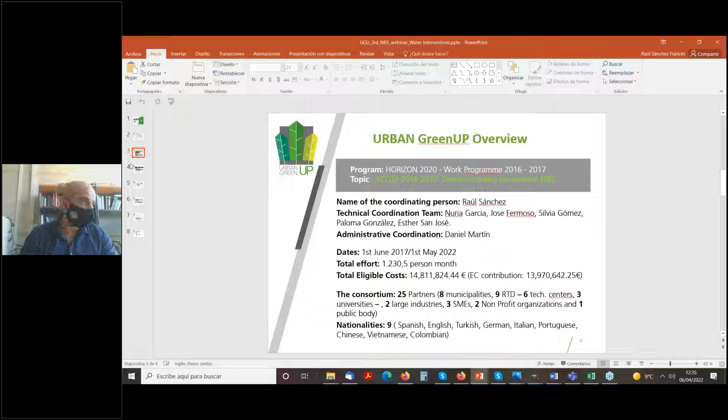Our Urban GreenUP project aims to demonstrate an innovative methodology for renaturing cities. We are delivering the concept of the renaturing urban plan through nature-based solution interventions, considering new technologies toward the adaptation of our cities, mainly to fight against climate change. We need to do this through the identification of the main city challenges related specifically to climate change.

We need to involve the key stakeholders. We are going to demonstrate the implementation of a massive amount of nature-based solutions. We want to evaluate and replicate the project at the European level, taking into account an interdisciplinary approach, and we need to involve social science and humanities.

In this slide you can see the worldwide dimension of the project. As I mentioned before, we have 3 frontrunner cities: Valladolid in Spain, Liverpool in the UK, and Izmir in Turkey. We also have 5 follower cities: 2 European follower cities, Ludwigsburg in Germany and Mantova in Italy, and 3 non-European follower cities, Medellin in Colombia, Chengdu in China, and Quy Nhon in Vietnam.

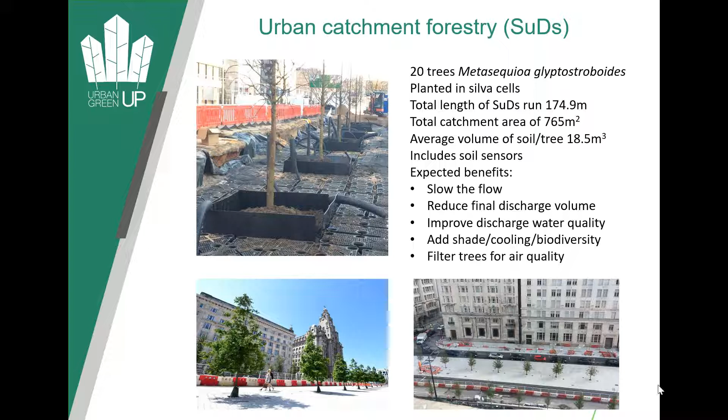And we're still looking at our water data analysis here for things like the heavy metals, but visually already the water is looking much better.

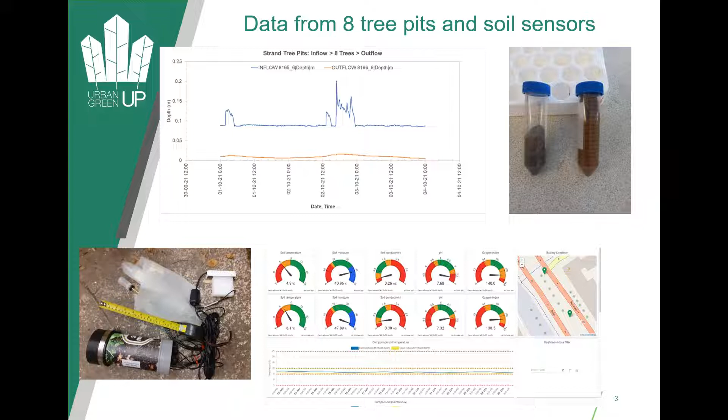Also in this system, if you look at the bottom image on the right, you can see we've got two green markers on that run of eight central trees. What that represents is a soil moisture sensor, shown as a picture on the bottom left. Those soil moisture sensors are monitoring things like temperature, pH, conductivity, and oxygen, and we're able to look at the soil where the water's coming in and where it's going out. We'll be looking to analyse the kind of data that will generate to help inform our knowledge about these systems.

I'm going to talk now about our island. The first one is in Sefton Park Lake. It's a freshwater island, made of recycled materials, recycled plastic, and natural materials like coconut coir. We have some netting around the edge to deter larger birds from destroying the vegetation before it got established. It's been in place now for about 18 months. It's had many visitors, and it's loved very much by the friends of the park.

It's inspired other works. We're going to be doing more of these islands in another city park this summer. One of the businesses in the park has also really liked the island and has now paid some additional money to do further environmental improvement works elsewhere. The island wasn't really that expensive, but it has provided new habitat. It's increased the pollinators, and we're hoping when we've analysed all the data we'll also be able to show that it's helped improve water quality as well.

Our second island is in a saltwater location in the docks, and it's a bit more of a pioneering island. It's much larger, 63 metres squared, whereas the freshwater one was only 25 metres squared. The island here is again made of similar recycled and sustainable materials. It's away from the navigable channel, so it's in a more sheltered location. We've had a number of visitors, and interestingly lots of global interest from all around the world, I think because it's quite innovative in what it's doing — it's the first of its kind. It did cost a little bit more, but there's a lot more to it, as you'll see in a minute.

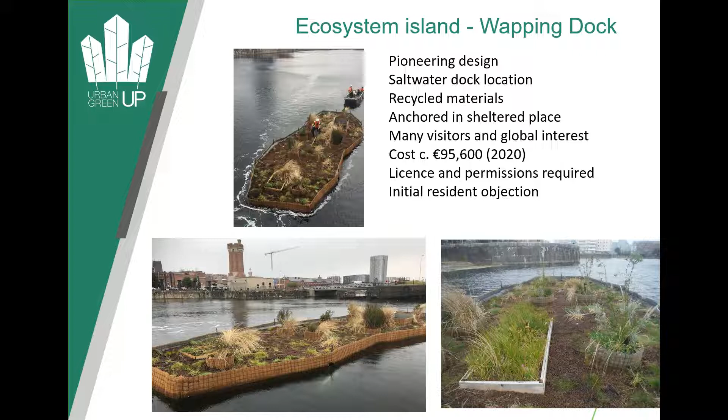We did need licenses and permissions that took a while, and we did have some initial residents' objections that have now been resolved. So just to have a quick look at the island, above the waterline there's a number of design features.

We've got these high buoyancy planters, which are raised areas that are soil filled, enabling us to put different types of vegetation on the island. Into the substrate we've got mixed planting of grasses and flowers, all salt tolerant. And then we've got these rainwater catchment planters, which are lined so that the rainwater that falls stays in this area, allowing plants that are more tolerant to less saline conditions to also thrive on the island.

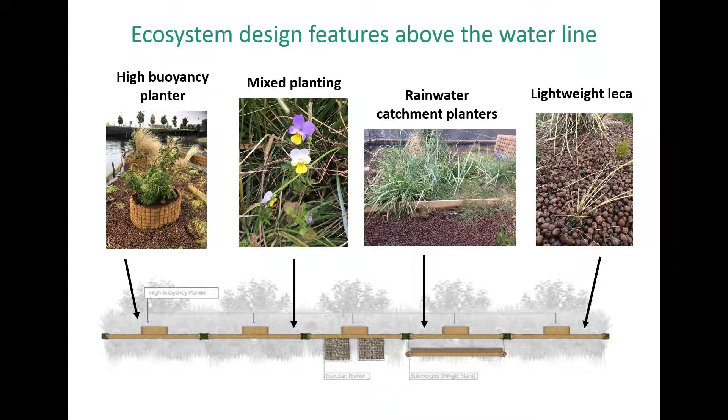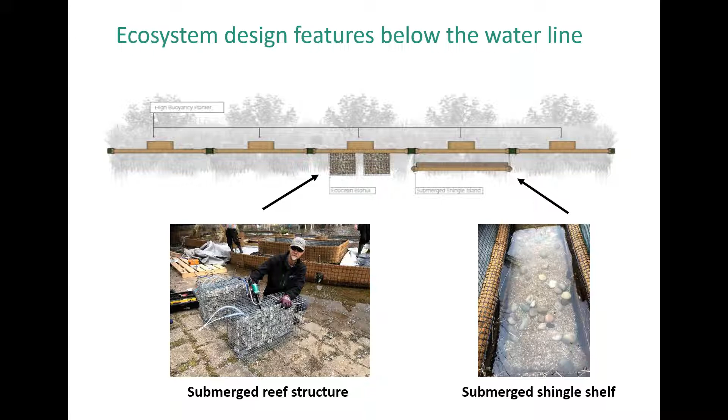And then we have this leca, the lightweight expanded clay aggregate, which is the substrate — it's like a tiny ball, thumbnail sized. It's really light, so it's very good for buoyant structures, and the holes inside it retain some of the moisture as well. If we look below the waterline, we've got a couple of submerged reef structures — these are cleaned oyster shells in cages — and we also have a submerged shingle shelf. The idea was to allow an area for fish foraging, or shelter from predators for some of the aquatic animals.

But the island's evolved, and we were there just a couple of weeks ago. Back in summer 2020 we had 23 species that we planted above the island. This is a winter picture, so it's not looking at its best.

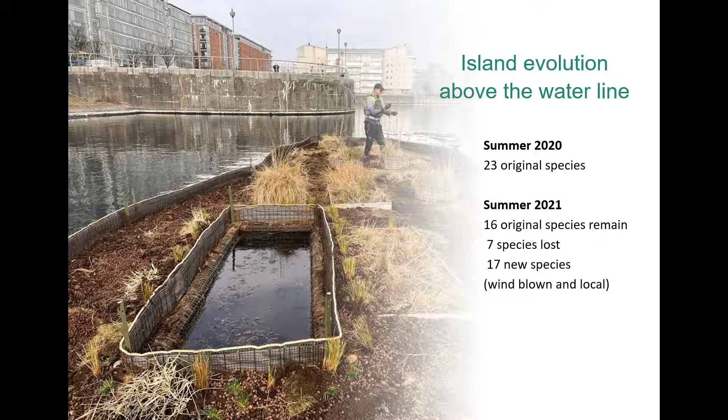But fast forward a year, and last year when we did the survey, we found 16 of those original 23 species. Seven species that were planted had been lost, or else we just weren't able to find them at that point on the island. But interestingly, we'd got 17 new species that had already come in, mainly wind-blown plants, and most of them had come from the local area.

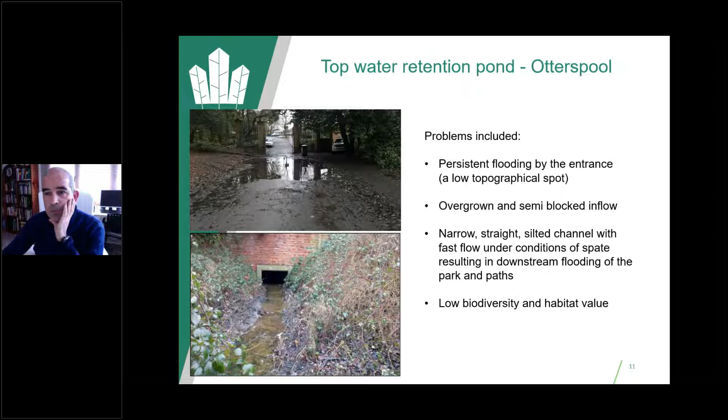Moving now to our water retention ponds, we have 2 of these. The top pond at Otterspool had a number of problems. Just adjacent to the pond, that top picture there is the entrance to the park, and that was a permanent puddle. It's a low spot in the park, and it was always wet. And then below, the entrance to the actual pond was very silted, very overgrown, and it was very straight. So as a result, when waters did flow down here, they flowed very quickly, and they caused problems downstream. And there was generally a low biodiversity.

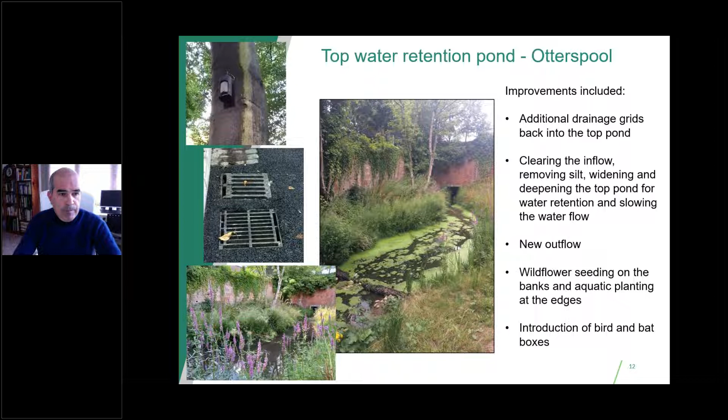So what we've done here in this top pond is we've excavated, dredged, widened that channel so that we now have a proper pond, so that as the water flows now, it is automatically slowed and contained and controlled. We've added some additional grids to help with general drainage from that wet entrance area. And we've planted a number of emergent and boggy aquatic plants at the edges, as well as taking the opportunity to put in things like bird and bat boxes.

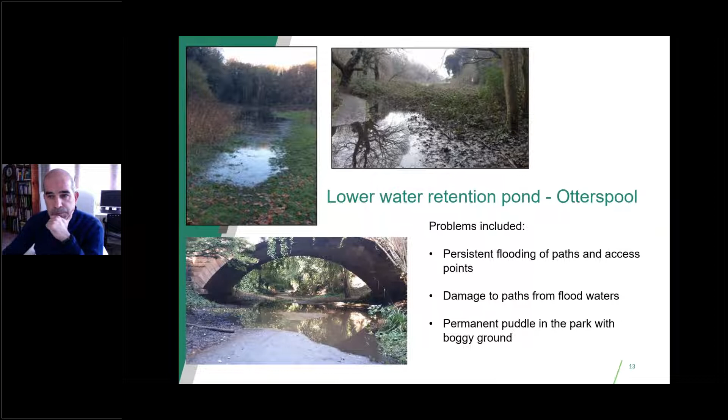The second pond is at the lower part of the park. So the water that rushes through that top pond, this is where it used to end up. It used to end up forming a really wet mini lake, really, in part of the park there. And you can see that it flowed across the paths and blocked access, and also caused damage to paths. So it was a real problem.

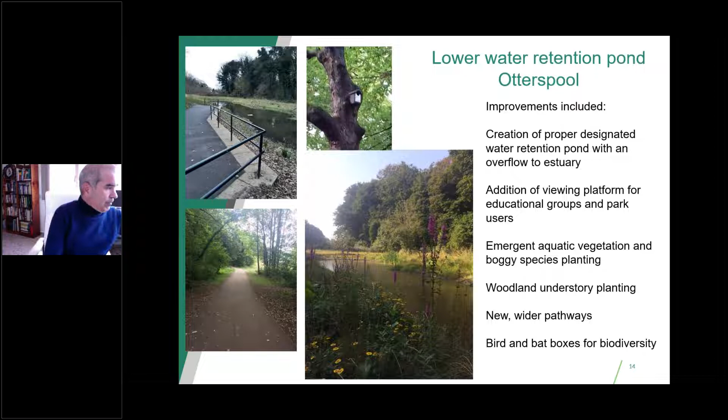Now we've designed a proper designated area for that water. It's become a pond in its own right. We've put in a viewing platform so that it can be used by leisure users and school groups, etc. We've got new paths. We've done quite a bit of planting with emergent aquatics and some boggy species and some woodland planting. And again, we've put in some bird and bat boxes. And since this has gone in, we've not had any issues to date in the park with flooding. So hopefully it has solved those problems now.

And then finally, the very last slide. This is our last project. It's due to complete in May 2022. The image at the bottom gives you a view of what it might look like. It's not going to look just like that at the moment, because we're going to have just one tree, and the planting will be a little bit higher and more colourful, but it gives you an idea.

The top picture shows a cross section of the rain garden, and it's going to be in 3 parts with 3 beds, and the beds will have different substrate mixes, and there'll be mixes of compost with horticultural grit, and one of them will have some recycled aggregate. The very bottom one, we're going to put a tree in, a whitebeam Sorbus species, and we've got enough soil volume now in that bed to do that with the design.

And in each of those beds, we're also going to place one of those soil moisture sensors that I talked about that was present on the very first urban catchment forestry, to see how damp and moist, etc., those beds remain with the different substrates.

The main areas that we're going to be testing here, we're going to be looking at water storage capacity in the permavoid, which if you can look at the top picture is the dark grey horizontal line at the bottom, which is the water storage area, and also the water that's stored in the soils. We've predicted, because it's not yet in place, that we will halve the flow reduction.

So at the moment, under conditions of heavy rainfall, we think that in this area there's up to 28.5 litres per second going to drain. We think we can halve that. So we're going to be looking at the water quality improvement as well. We think that the plants will help, and the soil will help to filter out some of the pollutants, and the water that does go to drain will be reduced and will be cleaner.

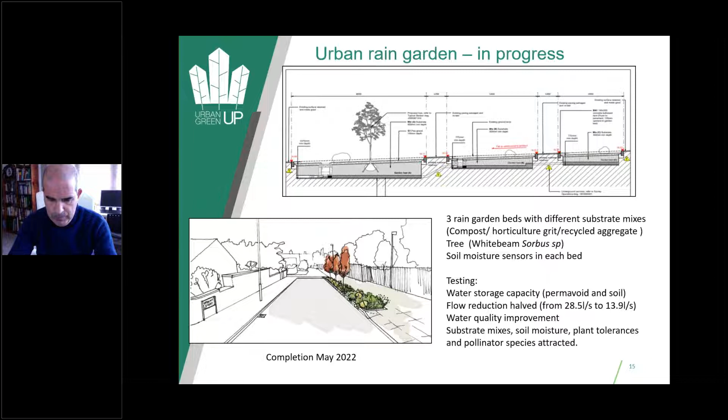And in addition, we've offered an opportunity here to look at how effective the substrate mixes are, looking at things like the soil moisture, the plant tolerances, and of course the pollinator species that we can hopefully attract as well. So a quick overview of some of the projects in Liverpool.

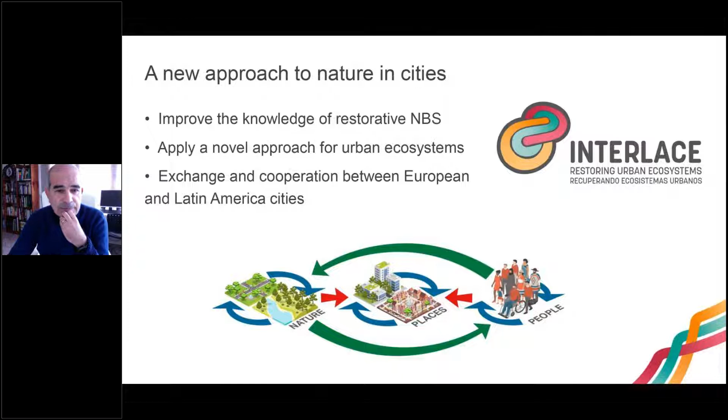And we are working on several Interlace products, like the Interlace Hub, which is an online community for sharing how to restore nature in cities. This is a really nice and useful website for the general public. We have also some more specific outcomes, like the Cities Talk Nature, which is an international exchange program based on learning webinars and also engagement events.

And also a third example of outcome is the Urban Governance Atlas, which is an interactive database with around 300 good practices on policy instruments and other tools for implementing nature-based solutions in cities. Now we have a call for contributions. Please, if you are interested, feel free to check the Twitter of Interlace and learn how you can contribute to this.

Interlace has also 6 city partners, 3 in Latin America, 3 in Europe. One of them is Granollers, which is my municipality, and we are addressing several socio-environmental challenges. And our main priority is building a city with water resilience. And this is going to be the main focus for the rest of my presentation.

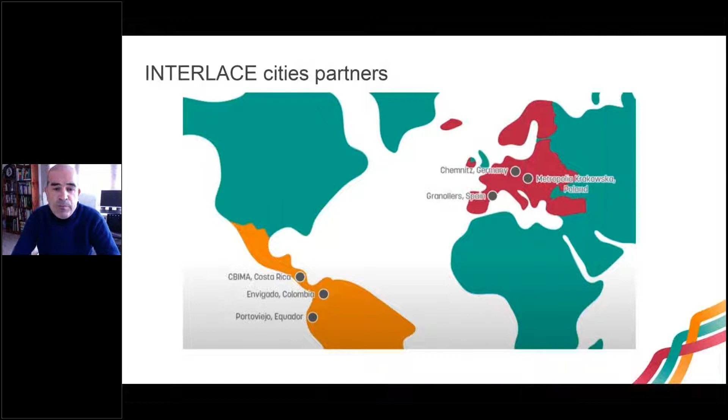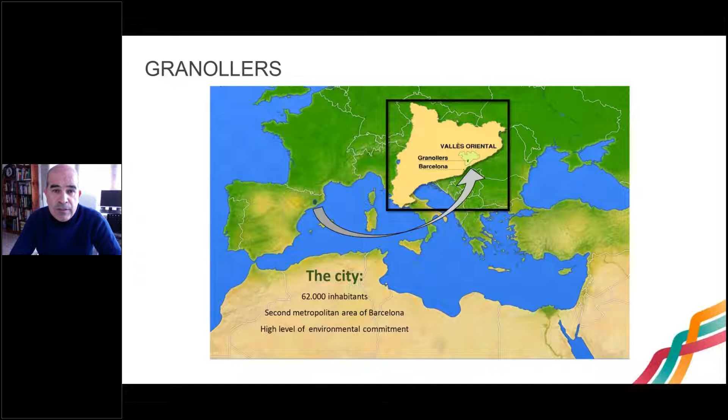So I will present briefly Granollers, which is a 62,000 inhabitants city that is located 30 kilometers from Barcelona in Catalonia, Spain. And in our geographical area, we suffer from frequent droughts and in some periods even water scarcity. As a consequence of this, we're implementing water governance to avoid the city living under water stress conditions. Next, please.

So the main issue is to ensure our water security, and we have found that one of the best solutions is implementing water reuse. We have a long experience on this kind of water reuse projects at local level, and Granollers City is taking a leadership role to promote these water reuse projects in other cities and also bigger administrations.

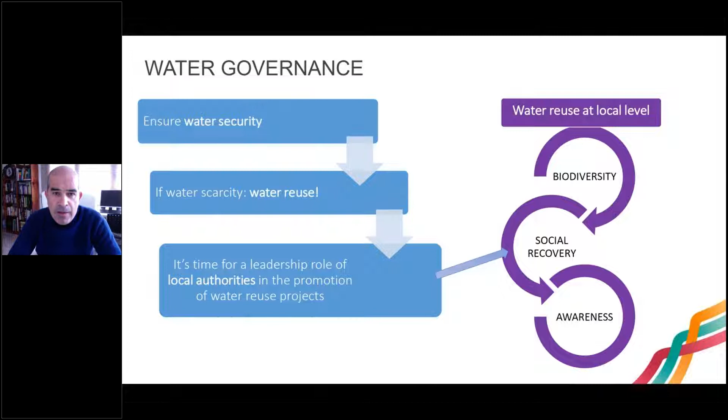And we always recommend that in case you are interested in implementing water reuse at local level, this needs to go together with the restoration of the ecosystems, also the recovery of the social use, and also the education and awareness of citizens, who need to know what the benefits of water reuse are. All these 3 requirements are included in our case study. Next, please. That I'm going to explain briefly right now. It's the recovery process of Can Cabanyes area.

This is a project that started a long time ago. In 1999 was the beginning, because the Can Cabanyes area was a peri-urban area, completely degraded, with a lot of environmental impact due to different human activities. And the most negative thing at that time was that no one identified this area as a part of the municipality. Next, please.

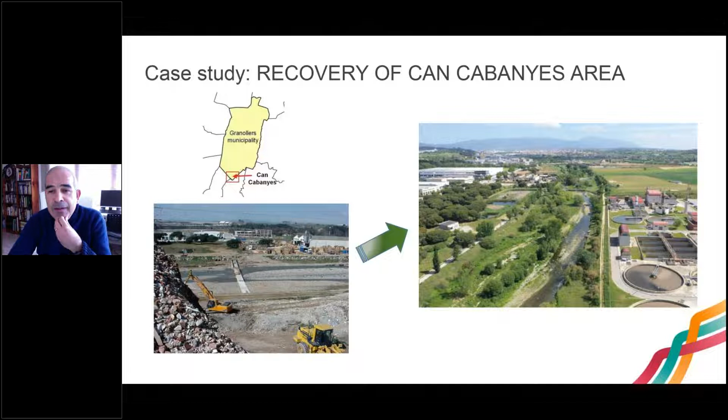The recovery process started with the building of a system of constructed wetland that was designed by the Polytechnic University of Catalonia. It was an innovative nature-based solution at that time, because it was a combination of shallow and deep areas with aquatic vegetation in order to remove the water pollutants.

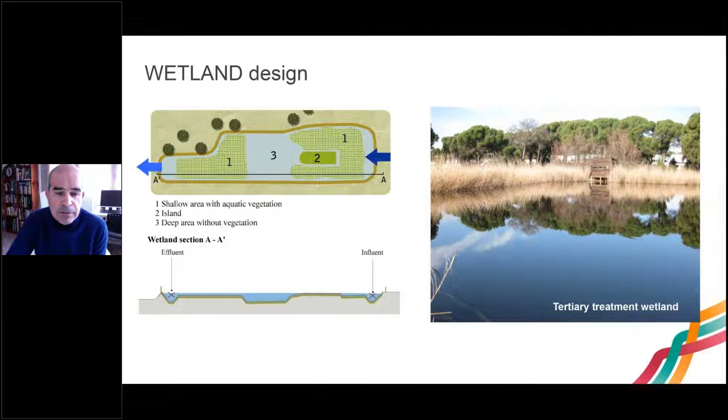Next slide, please. So this is the core element for our water reclaim system that starts in the city and gets the waters to Can Cabanyes area. Here you have an image with the whole water cycle. The wastewater from the city goes to the wastewater treatment plant, and a small proportion of this water goes to the wetland, receiving a natural treatment for 30 to 50 days.

And finally, the waters go to the water reclamation plant, which is a hydraulic facility with disinfection and filtration, which is compulsory according to the Spanish legislation on water reuse. And the final step is supplying this reclaimed water to the city for different municipal uses, mainly the irrigation of green spaces.

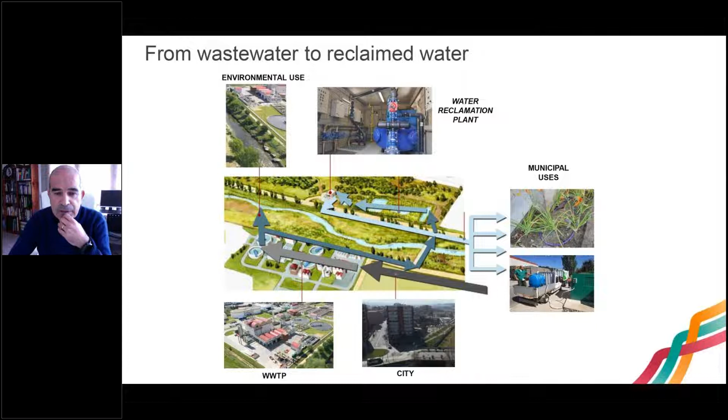So next, please. So after 20 years, this water reuse project has delivered 3 main benefits. One is the improvement of the water quality and making the reclaimed water available for the city. The second benefit is the creation of a new habitat for biodiversity that, together with the nearby river, is a great fluvial ecosystem. And now both sites are included in the Natura 2000 network.

And finally, the third benefit is the creation of a point of special interest for social activities in the peri-urban area, that now is a social corridor between the city center and the restored peri-urban area. We have around 600 users a day. This is a high proportion of visitors for this area for a medium-sized city like Granollers.

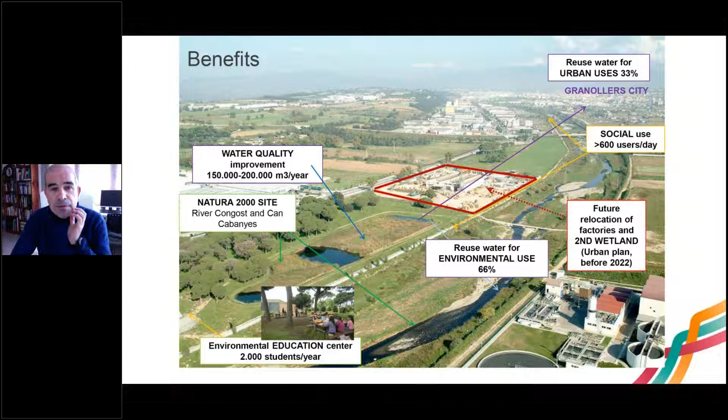We also expect more benefits in the coming years after the relocation of two factories that are placed next to the wetland. Next slide, please. Recently these two enterprises finished their industrial activity, and we expect that this year there will be the demolition of the factories and also the cleaning of the soil. And then we will expand the natural area with 7 hectares more, including the building of a second tertiary treatment wetland. It is a really successful project for the city.

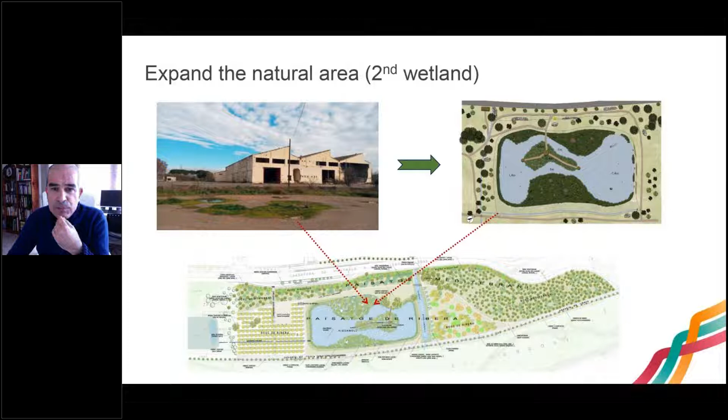Next slide, please. And this water reuse project has contributed to other water interventions in other city areas, like the river, where we have several river restoration actions developed for more than 10 years. And also, we are working on future projects. We are looking for financing to develop projects to improve the urban permeability and infiltration. And we want to create more natural environments in the streets of the city center neighborhoods.

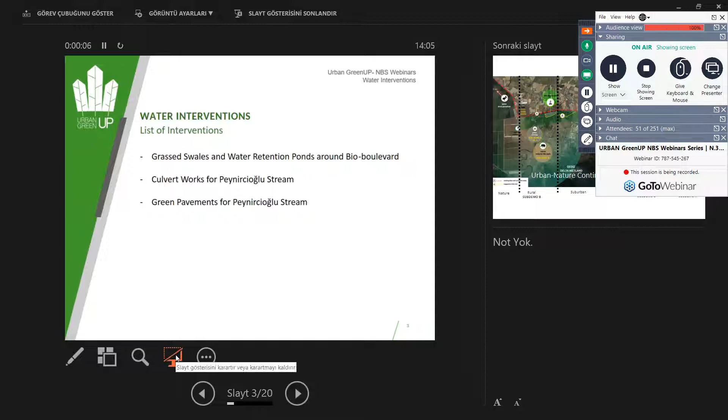Can you see my screen? Yes. One screen or double screen? Double screen, and also the dashboard from GoToWebinar. That's a problem, I think. Sorry. It's the same. We can see two presentations. Can you close the dashboard from GoToWebinar so we see only the presentation? Thank you. Perfect. If you want, you can also open your webcam. I can see my webcam big, but how can you see? We see perfectly your face and the presentation. Okay.

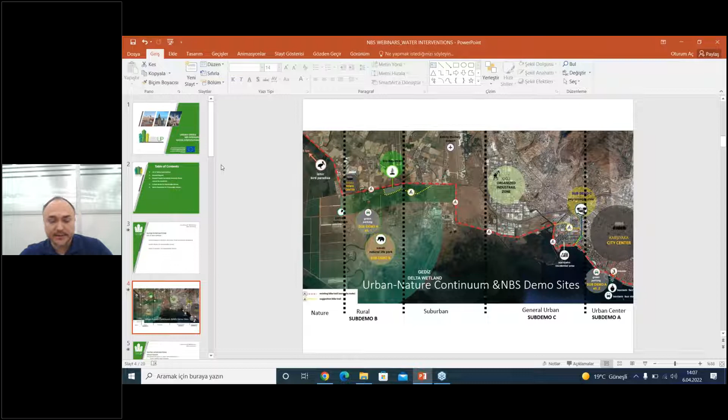The impacts include water quality improvements, flood risk reduction, local biodiversity enhancement, providing habitat for urban wildlife, offering recreational opportunities, increasing water retention capacity and biodiversity, and sustainable urban water management.

The first implementation is grass swales and water retention ponds. Grass swales will be installed in Bioboulevard as a system that slows down and collects surface runoff directly from impervious surfaces, mainly, and functions as a collector for a while until the soil is ready to infiltrate the water again.

This is the map of the implementation area. The Izmir Agricultural Development Center is planned in Sasalı Natural Life Park area, as you see in the map here, and Bio Boulevard is considered as a part of this project. 557 meters of swale system and Bio Boulevard educational path is installed, as you see in the red dashed area.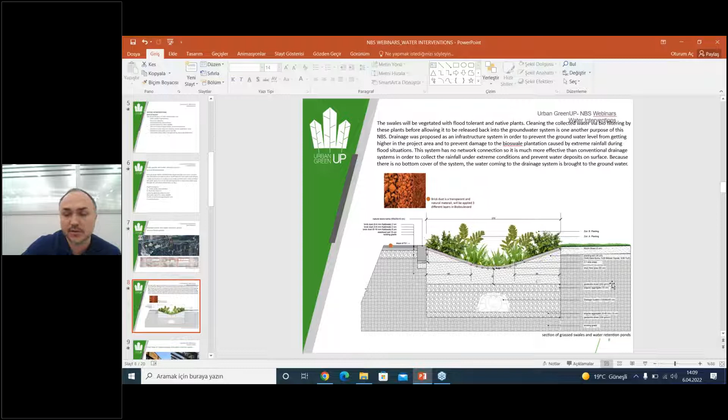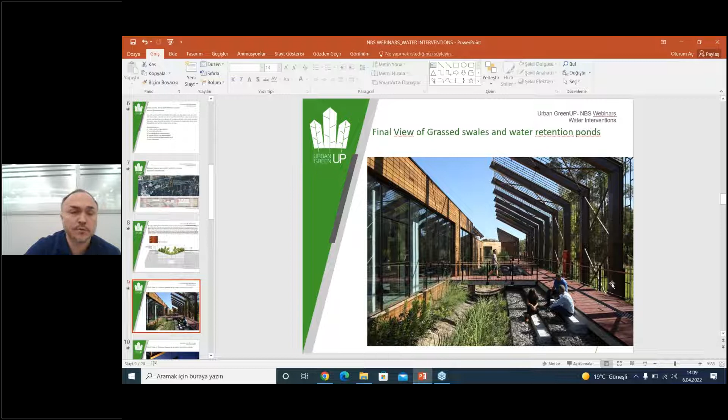This is the final view from the grass swales. As you can see, people can sit around the bioswale. And this is another view from the system and classrooms of the Agricultural Development Center.

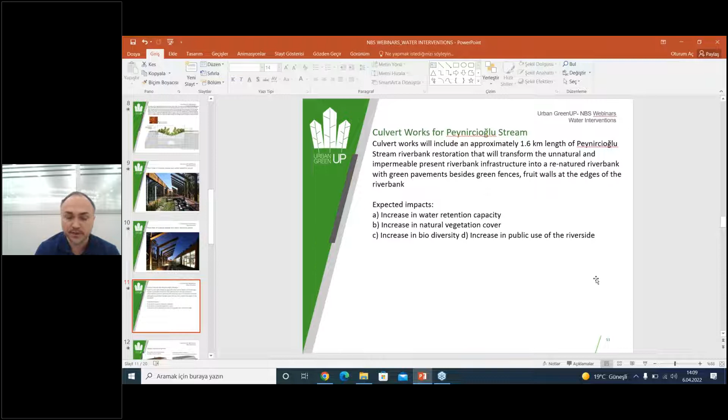Another implementation is culvert works. Culvert works will include approximately 1.6 kilometers length of Peynircioğlu Stream riverbank restoration, to transform the unnatural and impermeable riverbank into a re-natured and permeable riverbank.

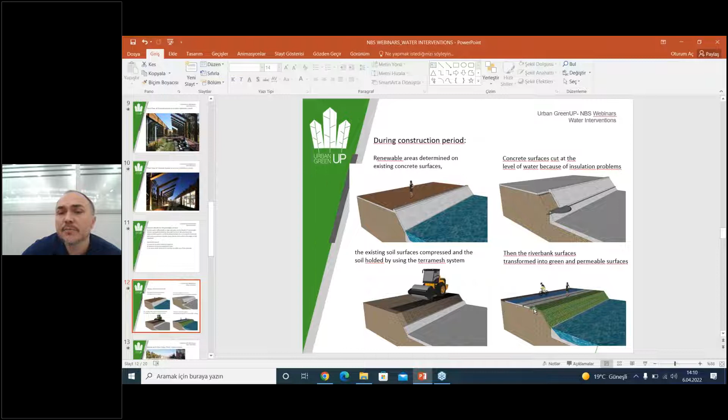During the construction period, renewable areas were determined on the existing concrete surfaces, and then the concrete surfaces were cut at the level of the water because of insulation problems. Then the existing soil surfaces were compressed and the soil held by using the terramesh system. Then the riverbank surfaces were transformed into green and permeable surfaces.

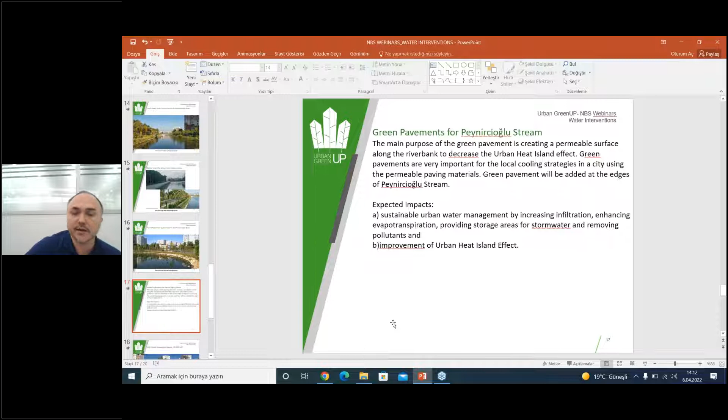Another implementation is green pavements. The main purpose of the green pavements is creating a permeable surface along the riverbank to decrease the urban heat island effect. You can see the permeable green path along the stream here, and this is another final view from the green pavements, which is close to pedestrian roads.

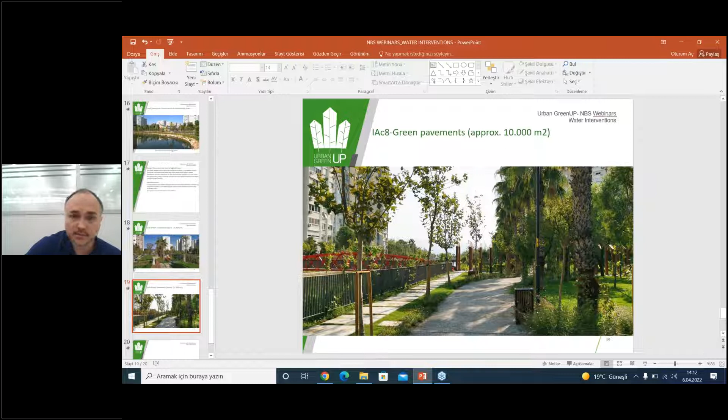We cannot hear the audio of the video. Sorry, can you repeat? We cannot hear the audio of the video. Audio, okay. I don't know what's the problem. If you want, I can cancel the video. If you have headphones or something that keep the audio off, otherwise you can try again. I don't have a headphone, I only use the computer microphone and sound. In any case, the video you're showing is available on the URBAN GreenUP YouTube channel and website, so people can see it from there.

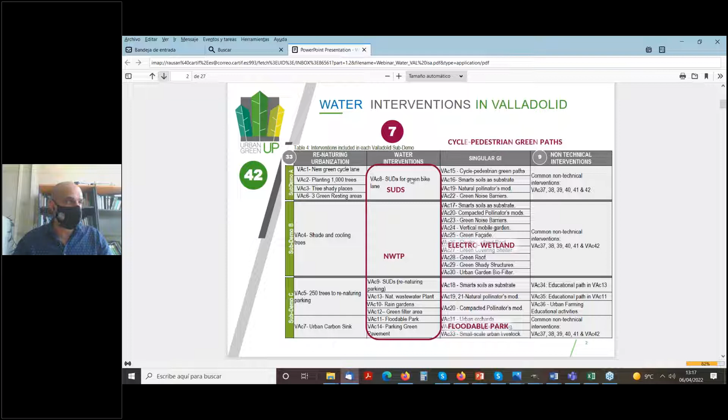In the case of Valladolid, we have sustainable urban drainage systems as water interventions, also the natural wastewater treatment plant, and some small water interventions related to cycle and pedestrian green paths. Also an electro wetland and floodable park as singular green infrastructure. This is the structure of the interventions related to water natural solutions in Valladolid.

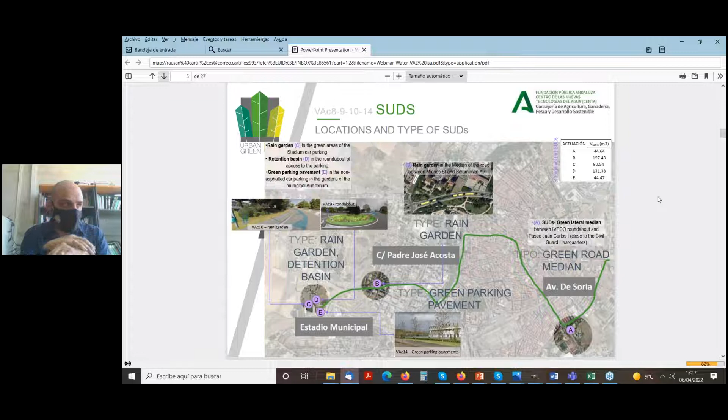Rain gardens are located in the green areas near the football stadium car parking. The retention basin is located in a roundabout near the access to this parking. Finally, we have green parking pavements also near the stadium, in different locations. All of these are located in different sub-demo areas in the city: rain garden, retention basin, and green parking pavements.

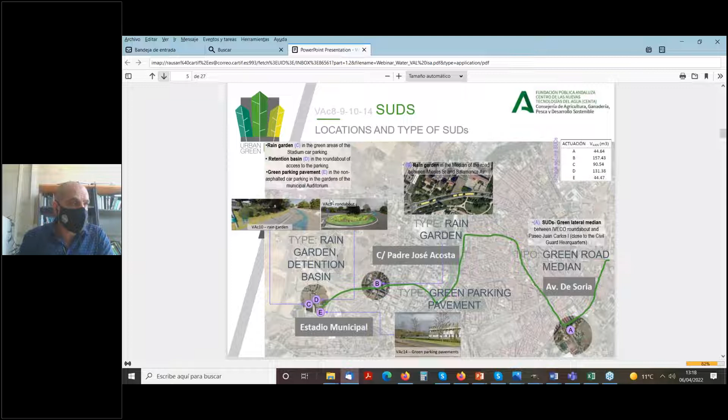This is the normal functionality of a sustainable urban drainage system. It's a very simple system to retain and drain the rainwater, using substratum and plants to filter the water.

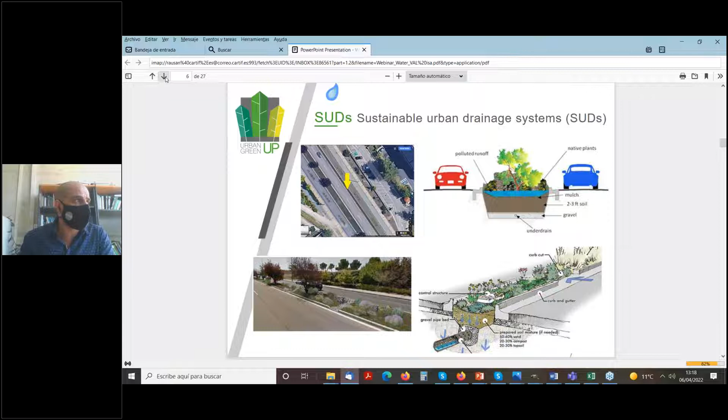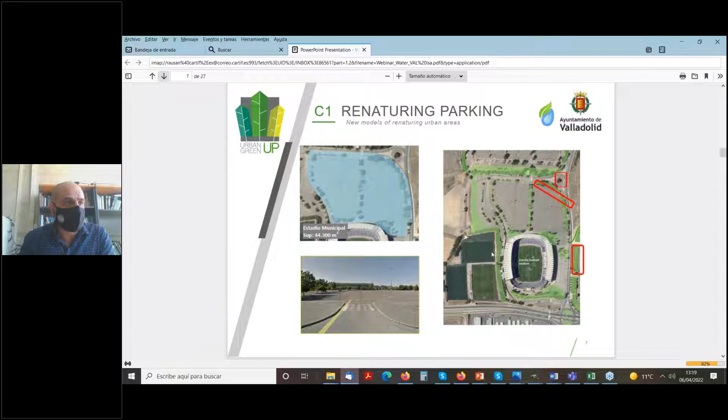In this slide we can see the area of the parking and where the SUDS will be implemented, including the roundabout I mentioned before, and the areas in which we are going to implement rain gardens. Here are some details about the roundabout where we will install the SUDS, the detention basin, and data regarding the infiltration.

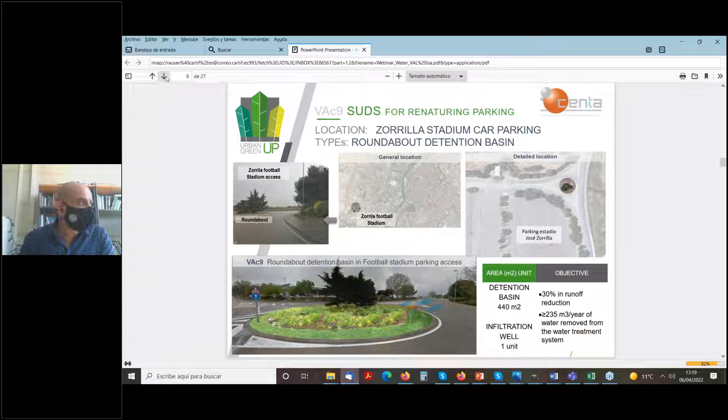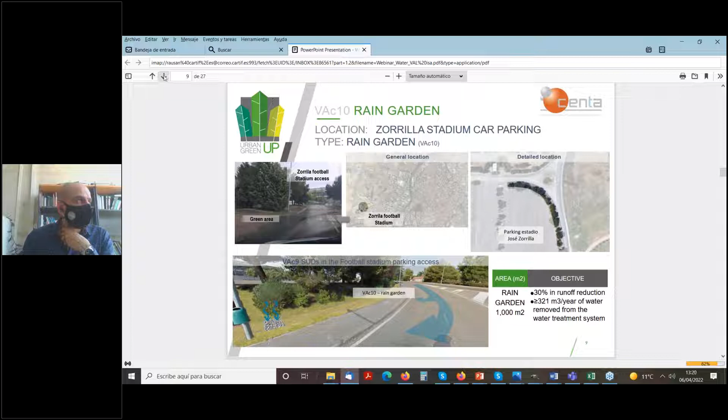In the parking area of the stadium, they are going to install green parking pavements with a very high infiltration capability, in order to manage the water in a sustainable way.

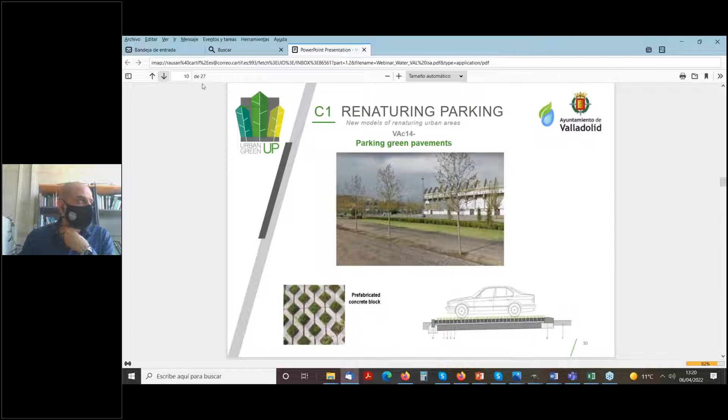Sorry, because this is not my presentation, some slides are a surprise to me, the order. Now I'm going to talk about the cycle and pedestrian green paths, another nature-based solution related to water.

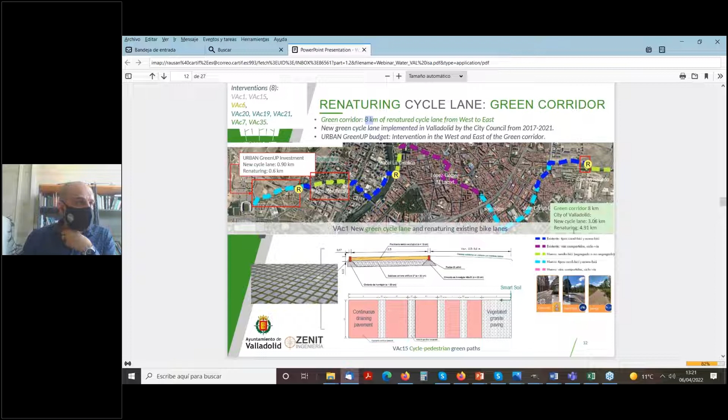Valladolid is going to implement this green cycle and pedestrian line. It's a green corridor of 8 kilometers of cycle line, and we are going to cover all the city with this corridor. This is the reason we can consider the green corridor also part of the water intervention.

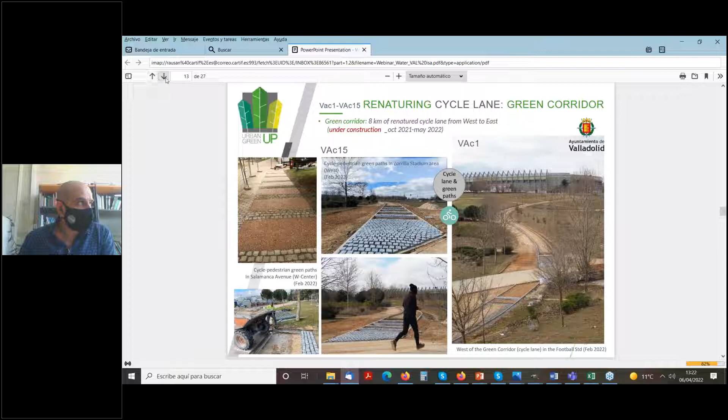This is because the city is going to use this construction, these bricks, to reduce the velocity of cycles but also to improve the infiltration capability of the path in these areas. As you can see here, this is a cycle lane but also a pedestrian lane, in order to achieve harmony in the use of this lane between citizens and cyclists.

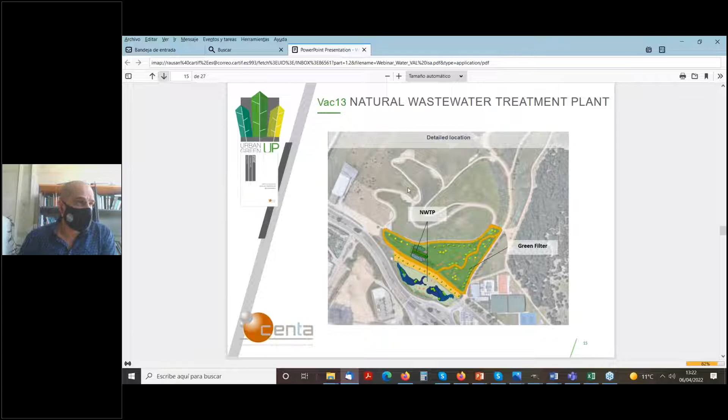Another intervention was - I say was because finally this intervention was not implemented - the natural wastewater treatment plant. This is the area in which it was foreseen to implement this intervention. The design was developed: a natural wastewater treatment plant, an educational path, and a green filter area with tree species capable of filtering water.

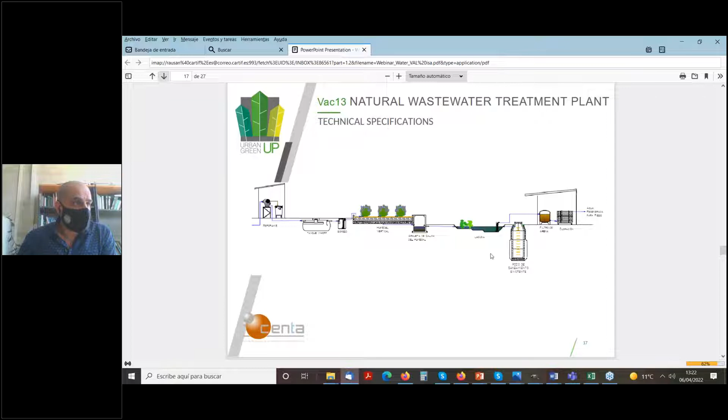These are the technical specifications of the wastewater treatment plant. But let me comment that finally the city did not get the final permission from the Duero river basin authority to implement this intervention, so finally it was not implemented.

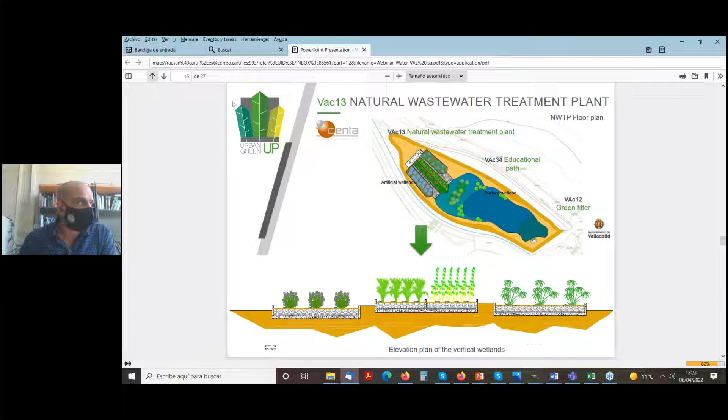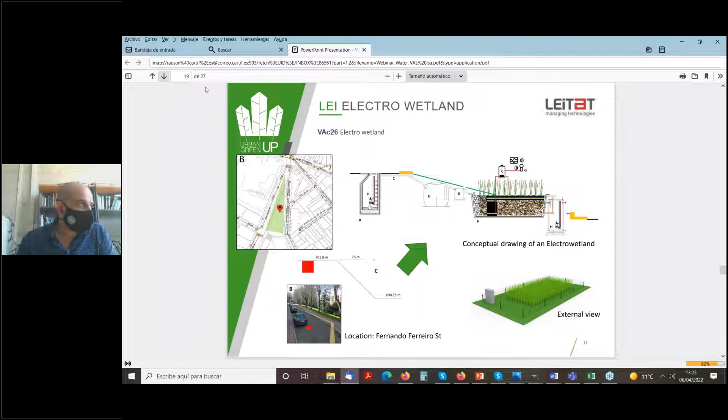Okay, the electro wetland is a very small natural solution. I'm talking about the site implemented with the idea to implement a new green area in the city, but also to obtain electricity through biochemical processes. Here we have plants, substrate and different elements, and we pass some water with organic matter load through it. The idea is that through biochemical processes we filter this water, but we also produce electricity.

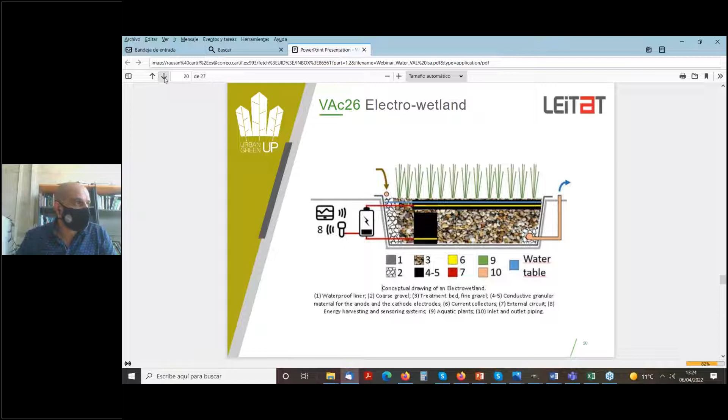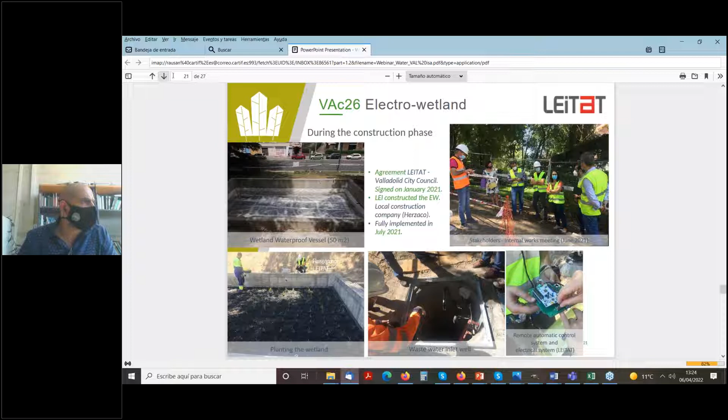This is a demonstrative intervention. This is the structure, and we have more pictures about this. We have a new blue and green area in the city, around 50 square meters of green area. This intervention was implemented and is working.

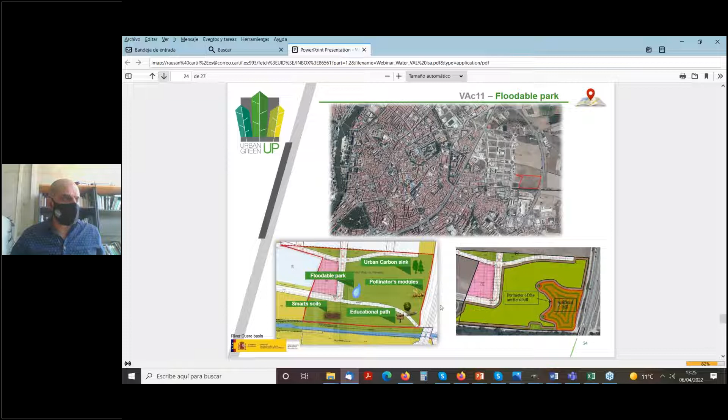But finally, the Duero River Basin authority didn't allow the implementation of this intervention, because the geological conditions didn't recommend it, and also because other alternatives in the city were not viable or feasible. So finally, this intervention was not implemented in the city.

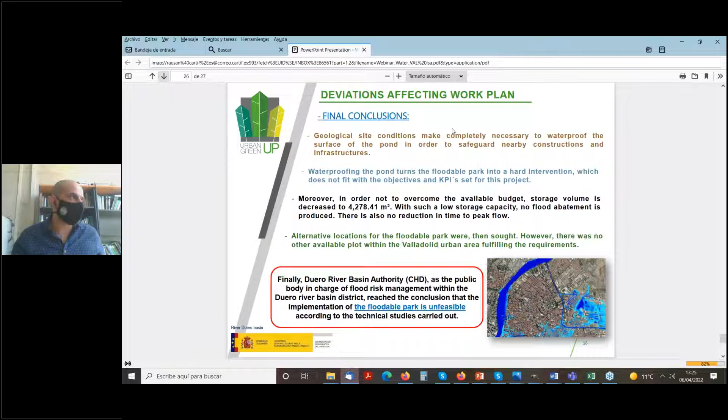Sorry for this somewhat random presentation, but it was not prepared in advance. That's all from my side. Let me say that Alicia Villazan is the person in charge of the Urban GreenUP project in Valladolid, so you have her contact here. If you have some questions, I will try to solve them today, but if you have deeper doubts, I think you can contact her. Okay, thank you very much.